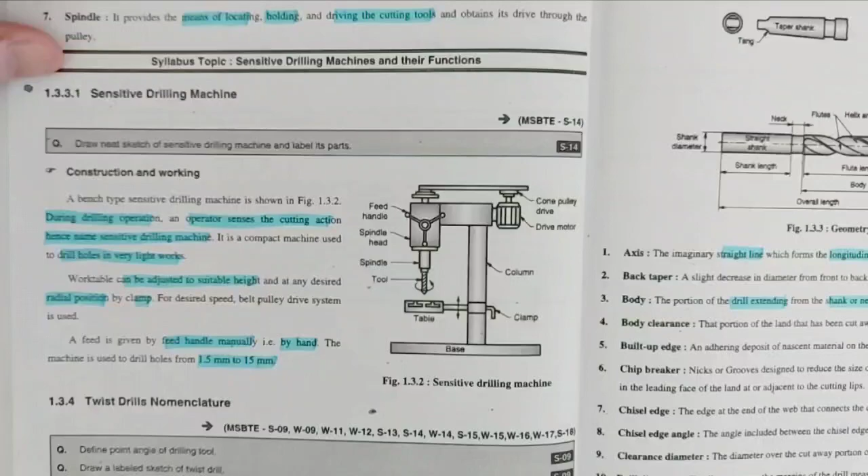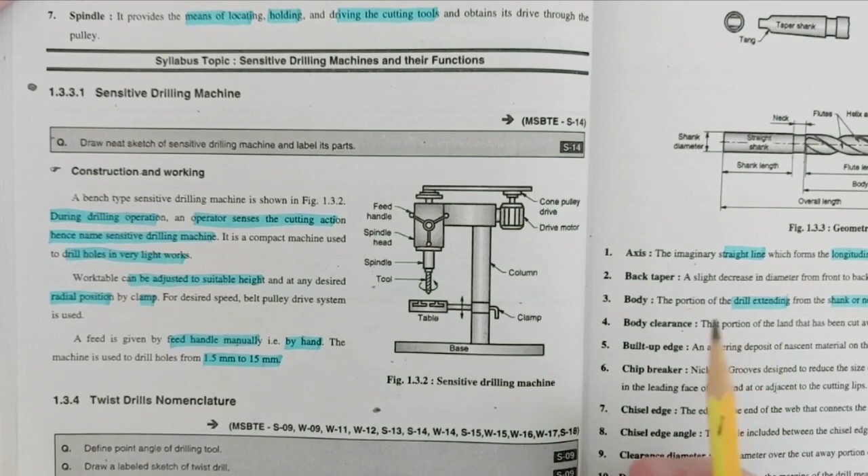A sensitive drilling machine. As the name suggests, sensitive drill machine - the operator senses the cutting action. That's why it is called sensitive drilling machine.

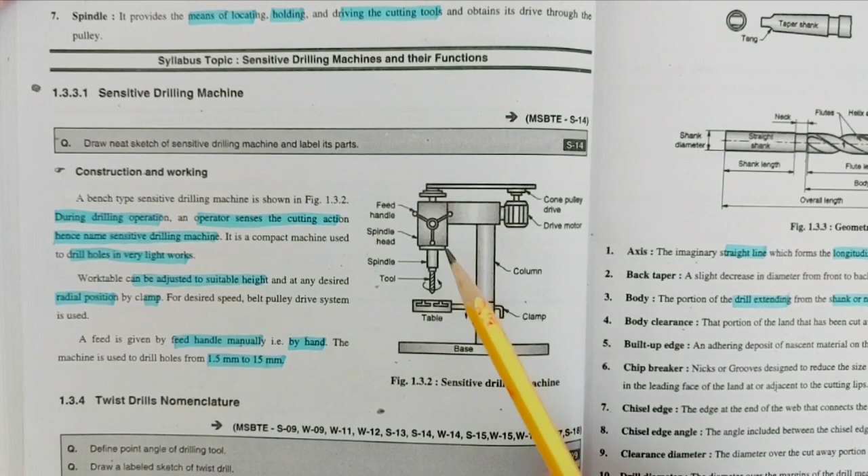This is the bench type sensitive drill machine. Since the operator senses the cutting action, means either the hole is completed or not, operator senses by giving the feed by this handle. Spindle moves down, tool cuts the hole. So operator senses through this handle whether the hole is completed or not. That's why it is called a sensitive drilling machine.

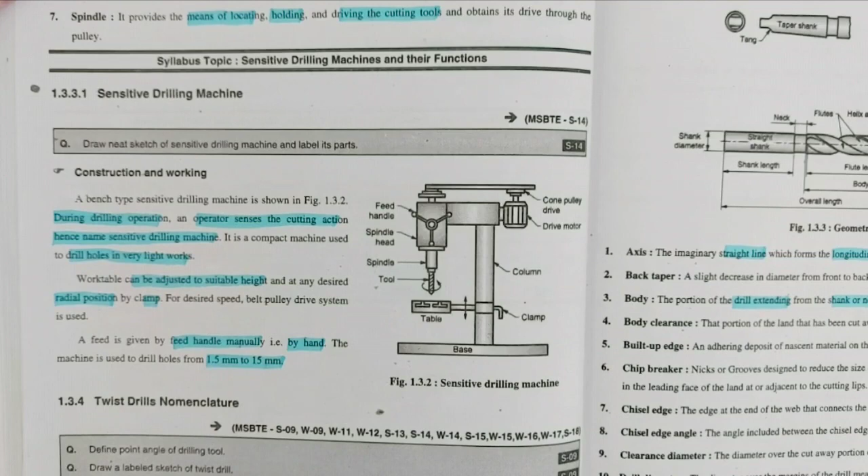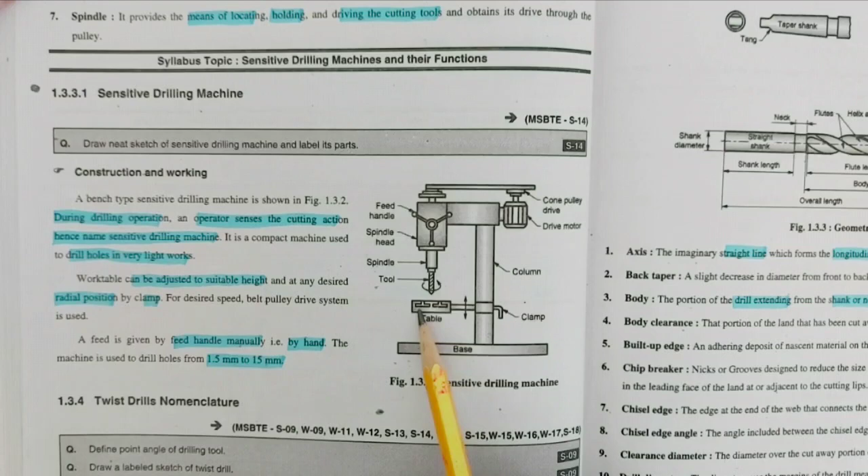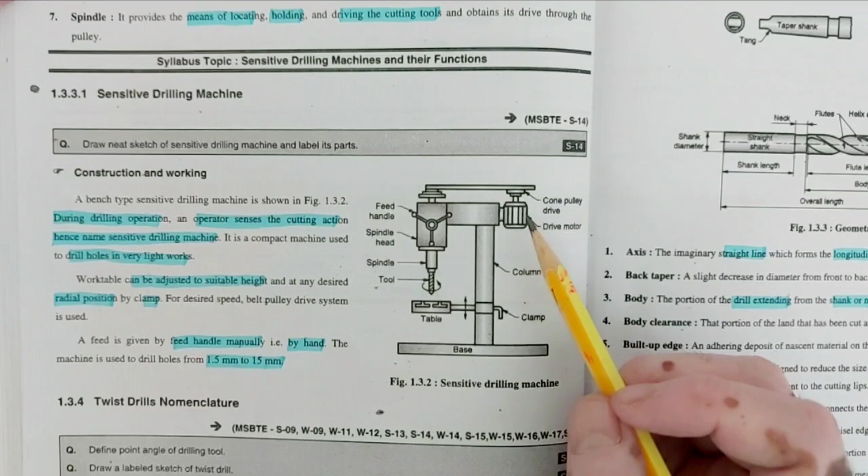Obviously this work table can be adjusted according to the height of the workpiece, and there is a radial clamp provided. This column, this motor, this pulley, belt - this rotates and spindle rotates, and this feed handle is used for giving the feed to the workpiece. Table can move up and down, and this feed is given by handle manually, meaning by hand. This machine is suitable for drilling holes from 1.5 millimeter to 15 millimeter diameter.

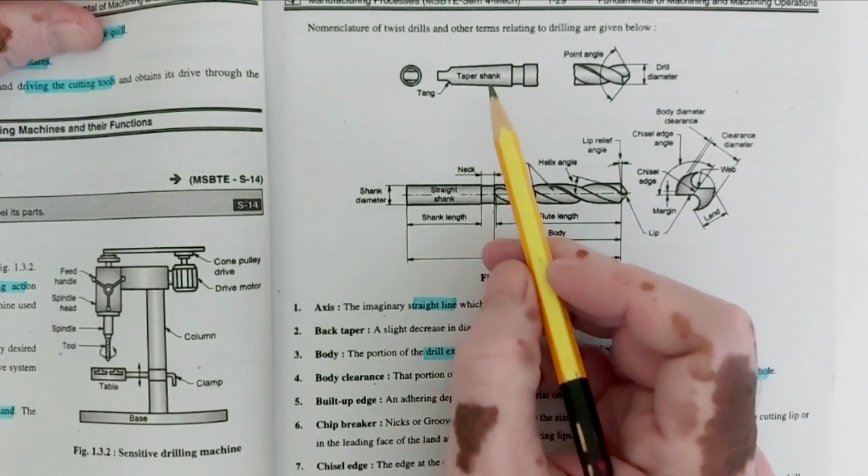Then nomenclature of drill bit. So this drill bit, this taper shank, this point angle, drill diameter, and these are called flutes: helix angle, lip relief angle, flute length, body, shank length, overall length of the drill bit. So this is the twist drill nomenclature.

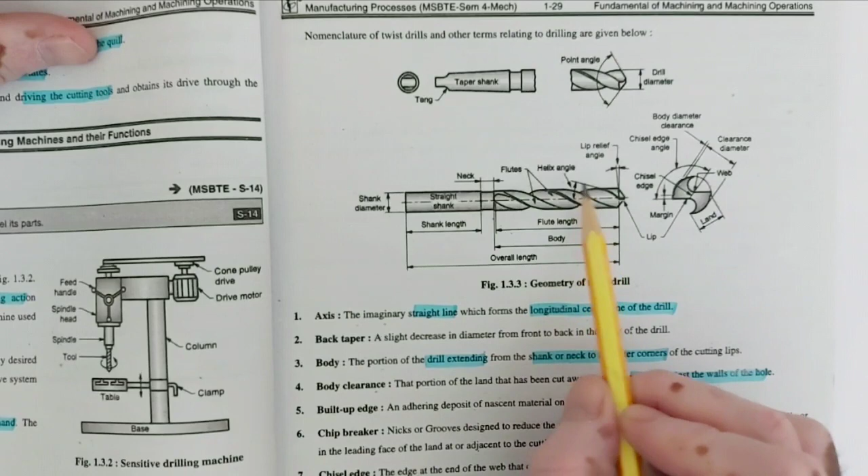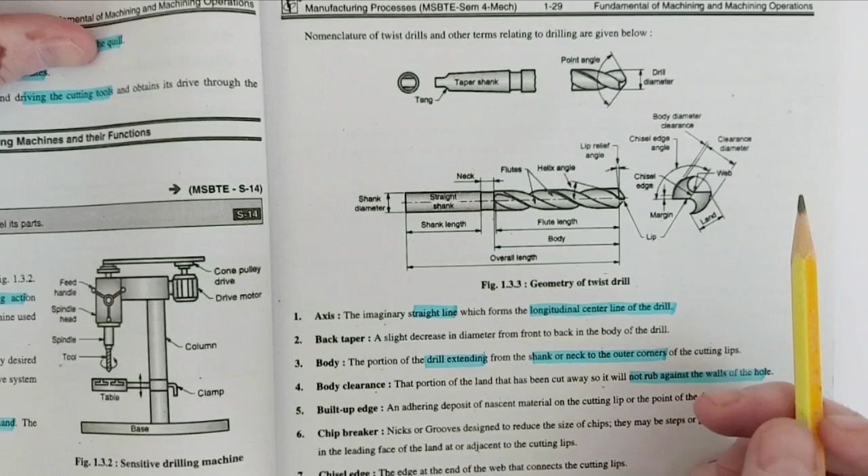So this twist drill - because spiral flutes are provided, that's why it is called twist drill. And all diameters, land, lips, chisel edges are provided in the drill bit for proper cutting.

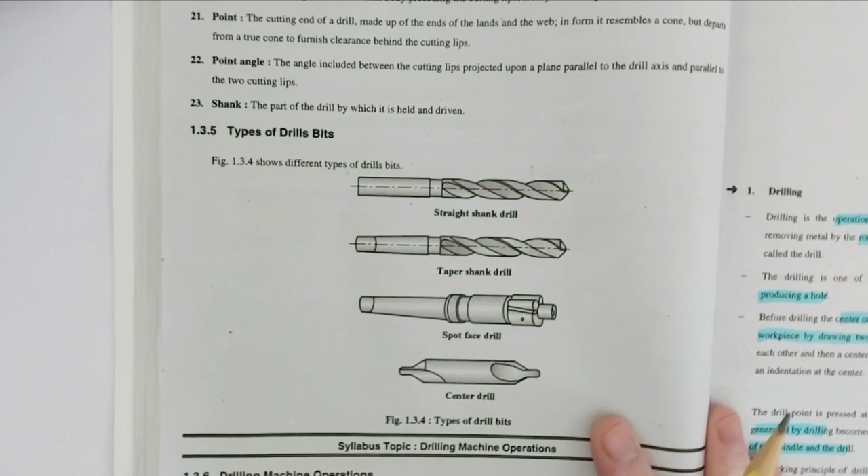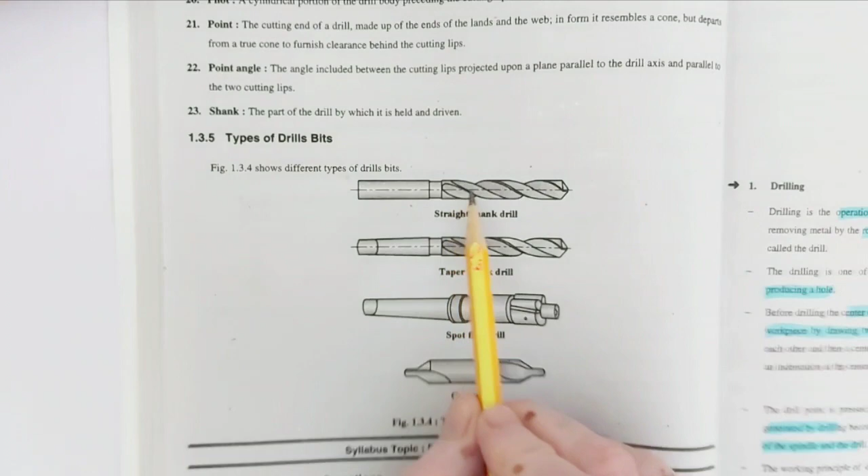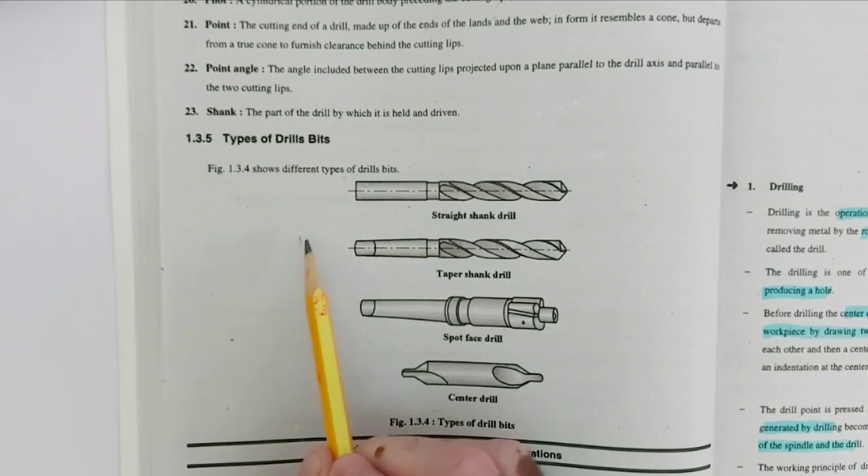Then types of drill bits. Straight shank drill bit, in which this shank is straighter one, that's why it is called a straight shank drill bit. And this taper shank - this taper is provided for holding into the sleeve of the drill machine. This is the Morse taper. Morse taper is 1:20. This standard taper is inserted into the socket of the sleeve. So since the shank is tapered, that's why it is called a taper shank drill.

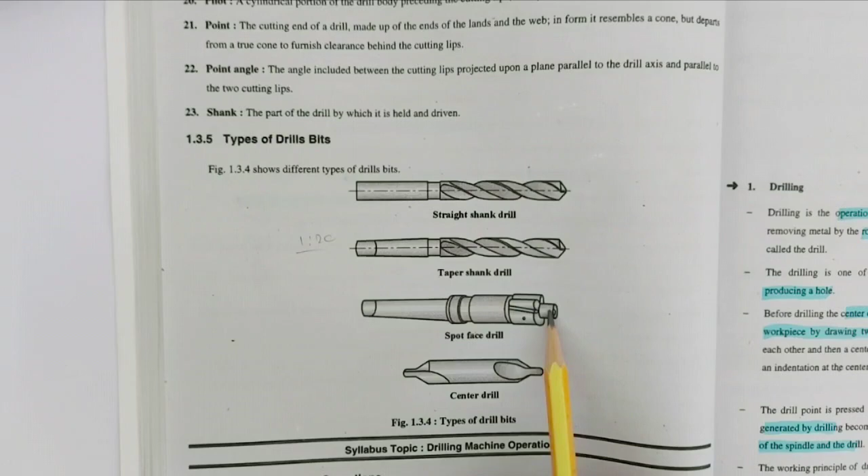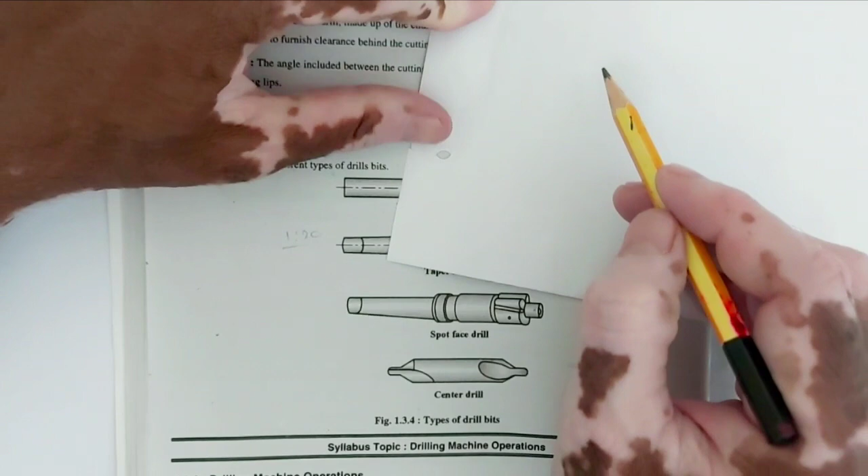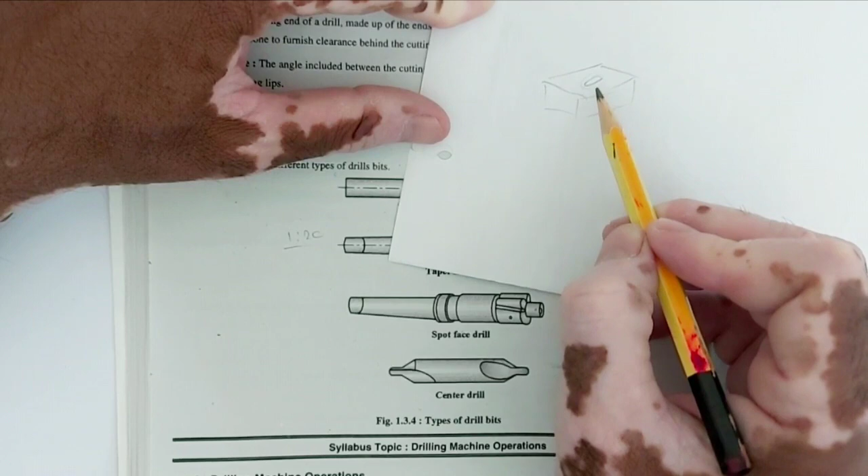And spot face drill. Spot face drill means this portion is provided for inserting into the hole. Sometimes what happens - suppose this is the workpiece and you made a drill hole over here. So this surface is a rough one. For cleaning this surface, spot face drill bit is to be used. So this portion is cleaning the surface of the hole. That's why it is called a spot face drill.

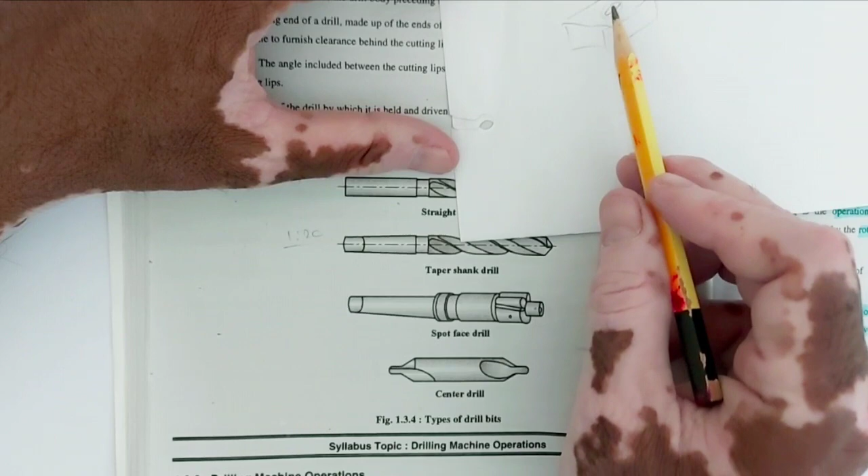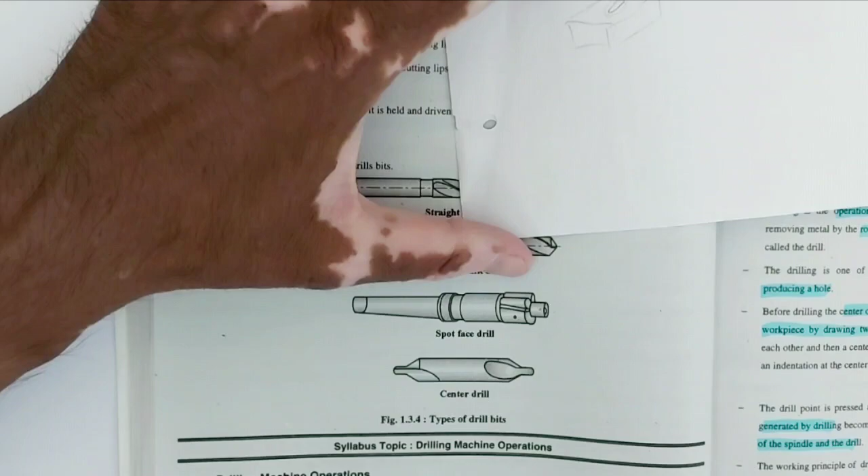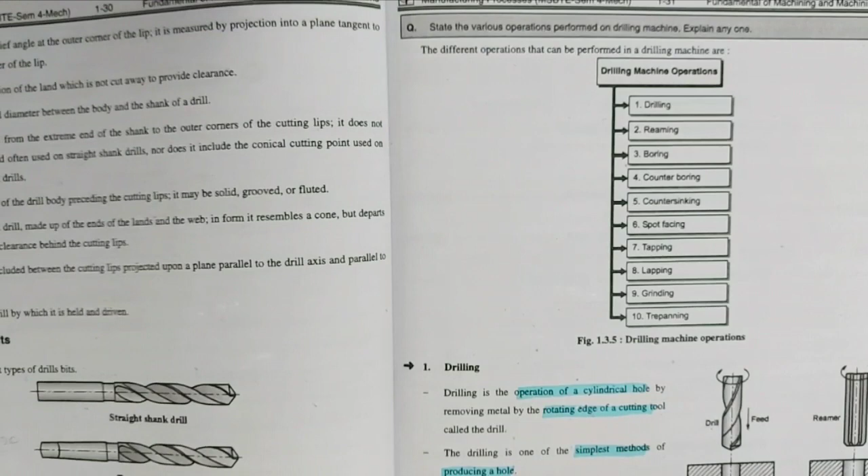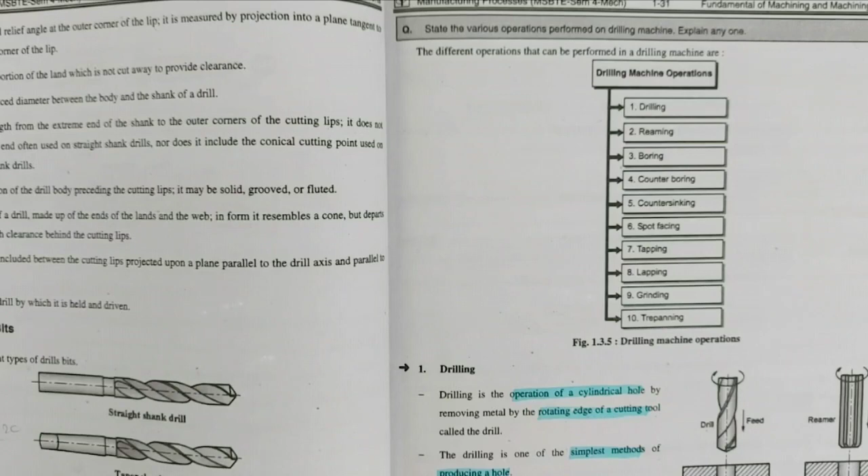Then center drill, for marking the center before using the workpiece on the lathe machine. So now there are different drilling operations to be carried out on a drilling machine: drilling, reaming, boring, counter sinking, spot facing, tapping, lapping, grinding, and trepanning. So one by one we will see the operations.

First one is drilling. As you know, the drill bit is required for making the hole, for making a cylindrical hole by removing metal by rotating the edge of the cutting tool called drill. Drilling is the simplest method of producing a hole.

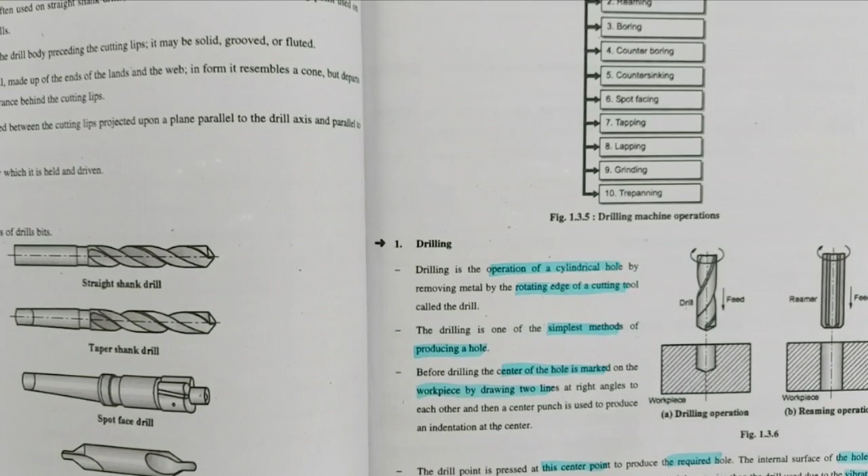Before drilling, the center of the hole is marked on the workpiece by drawing two lines at right angles to each other, and then a center punch is used to produce an indentation at the center. The drill point is positioned at this center. The internal surface of the hole so generated by drilling becomes rough, and the hole is always slightly oversized than the drill used, due to the vibration of the spindle and drill.

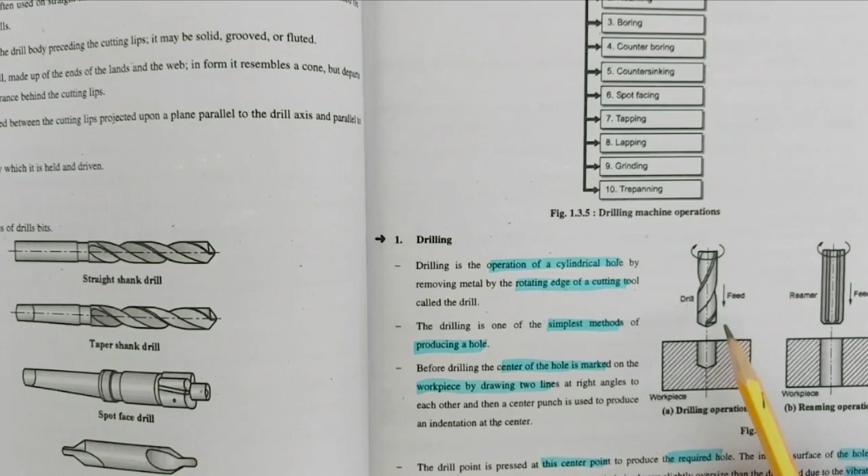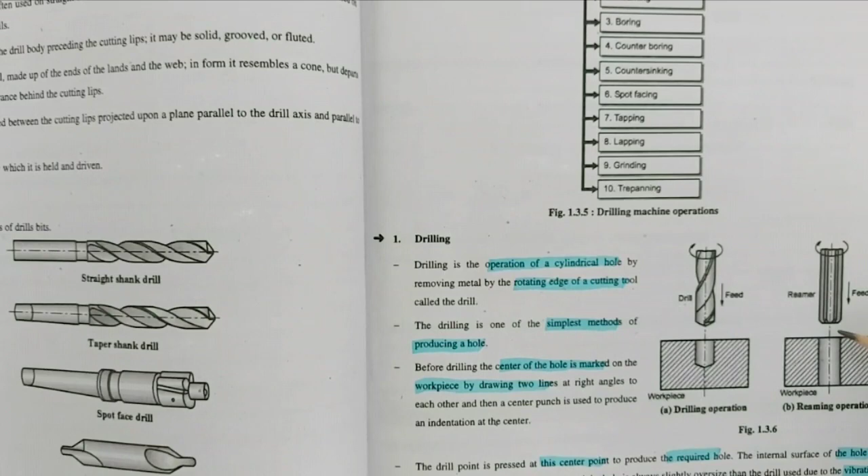Then second one is reaming operation. Reaming operation means cleaning the hole. After drilling, you may observe the marking of flutes on the drilled hole. So for cleaning that hole, reaming operation is carried out, in which a reamer tool is used, having straight cutting edges of the same diameter. It is inserted, and the reamer rotates as the drill bit rotates in the drill machine, so this hole gets cleaned up.

That operation is called reaming operation. This operation is carried out after drilling, for getting greater accuracy. The tool used is known as a reamer.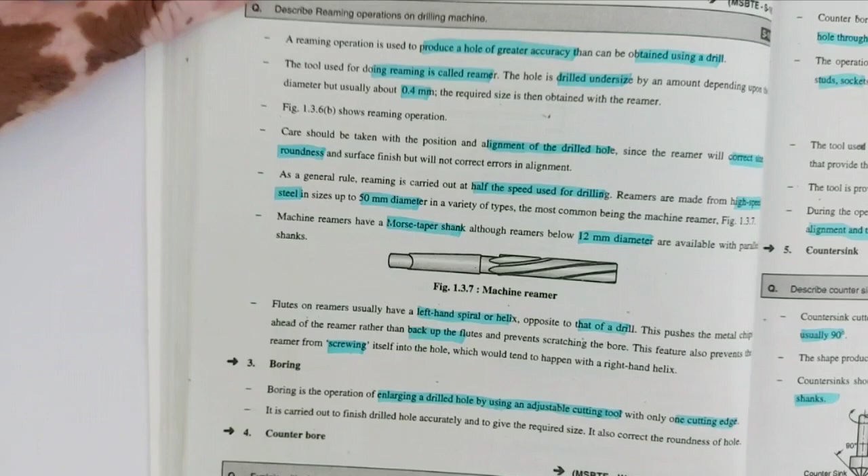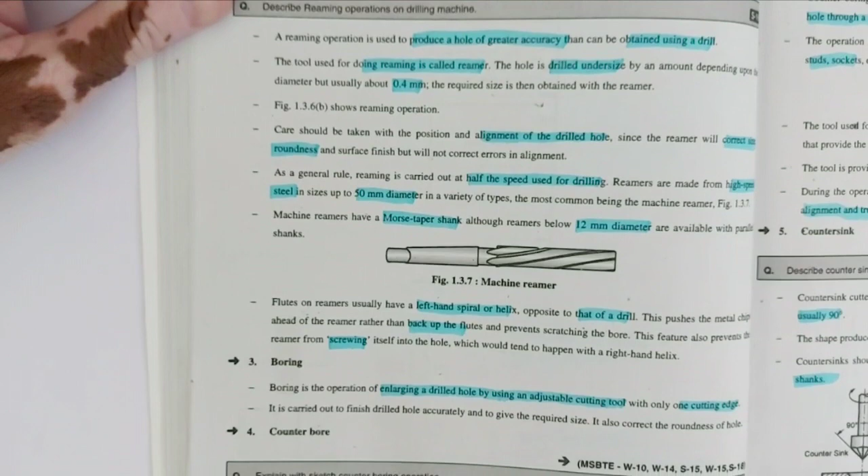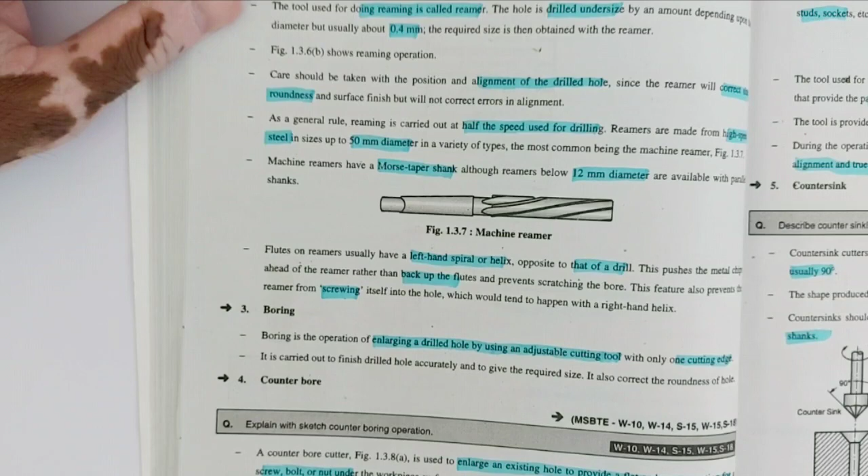Then boring. Boring means enlarging the previously drilled hole - enlarging the diameter of the previously drilled hole by using a cutting tool. That is called boring operation.

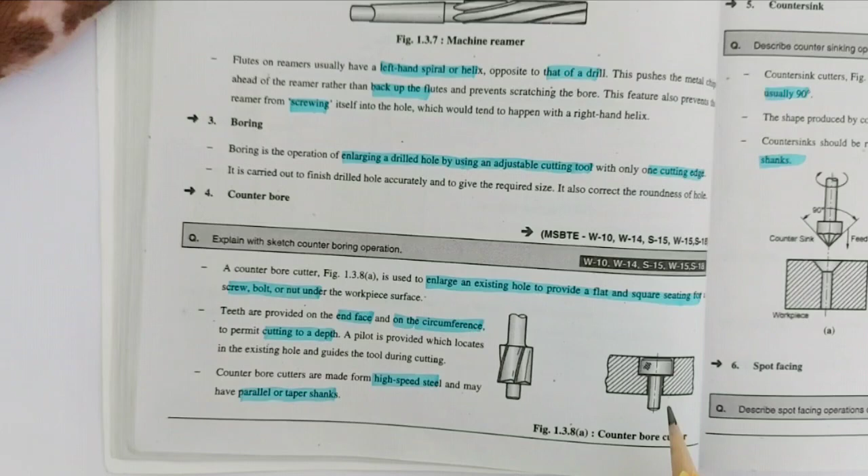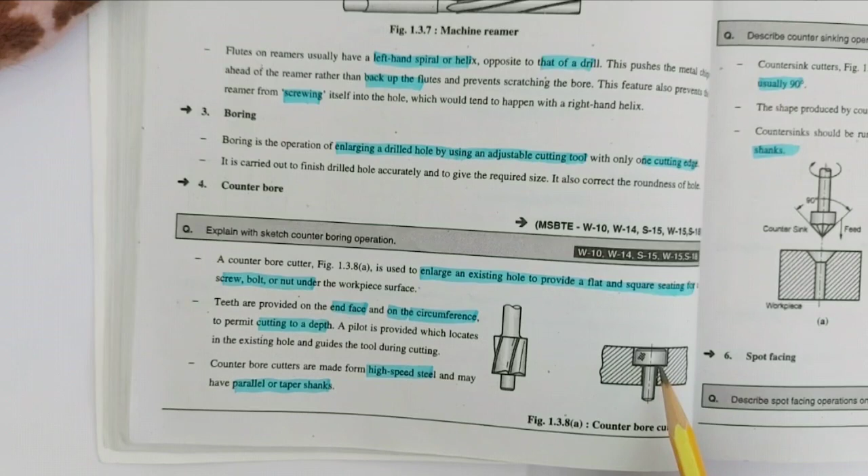Then counter boring. Counter boring tools are used, and it is carried out in two steps. First we should know what counter boring is. Counter boring means enlarging the top of an existing hole, to provide a flat and square seating for a screw, bolt or nut under the workpiece.

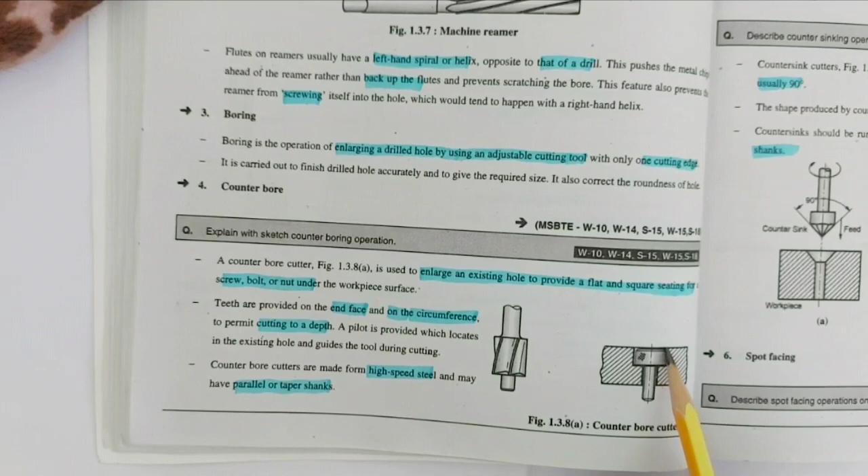So it is carried out in two steps. First we produce the hole, then after that the counter bore tool is used for enlarging the top of the hole - that is called counter boring. The figure of counter bore will be like this: this hole and this enlarged hole - that's the counter bore, to accommodate the head of the nut or bolt.

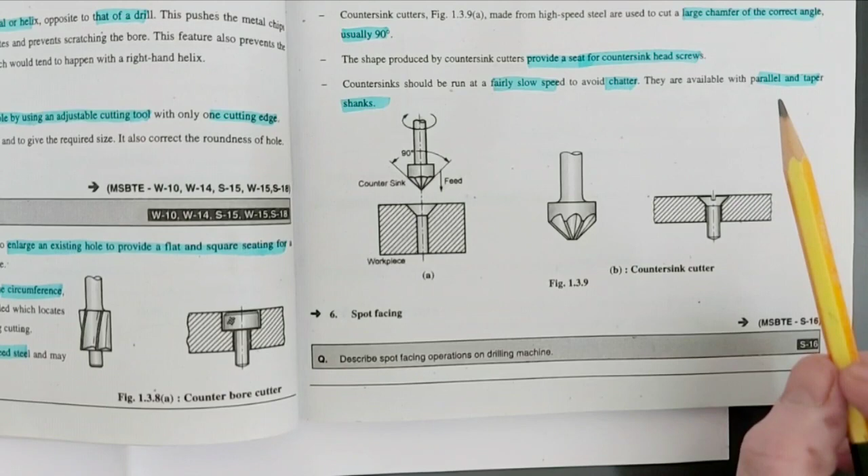So that's counter boring. Then counter sinking - the same process is there, only difference is that first you produce the hole, then counter sinking tool is used for enlarging the end of the hole, but in an inclined manner. That is called counter sinking. The counter sinking tool is used to cut a large chamfer of the correct angle, usually 90 degrees.

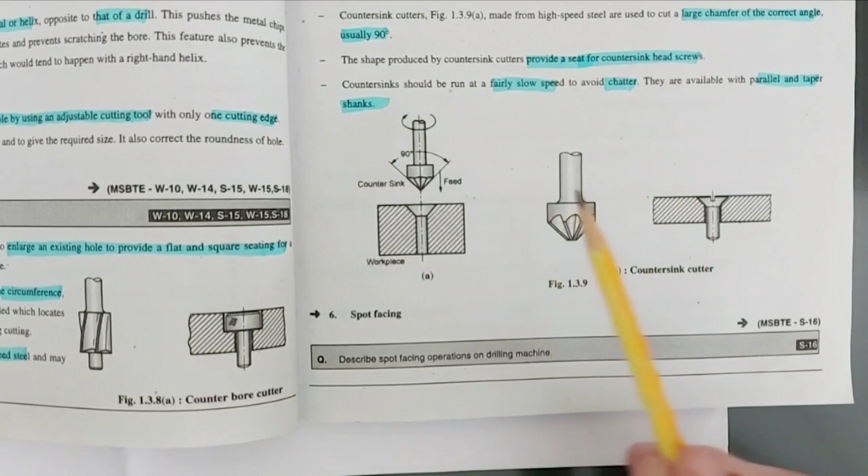So here you can see the operation. This hole is produced and this counter sink is inserted. This is the tool for hiding the head of the screws. Okay, so that's counter boring and counter sinking.

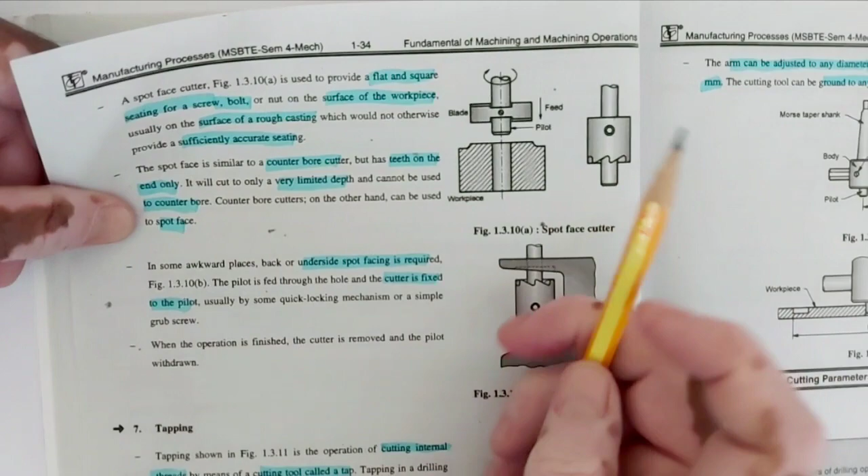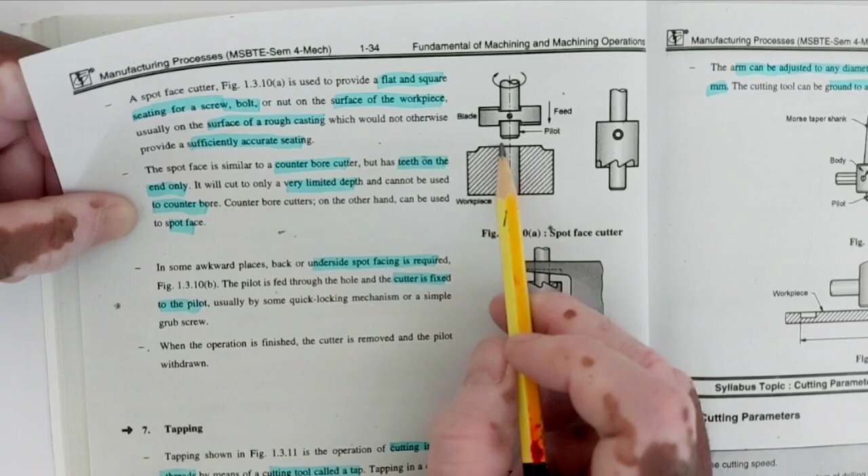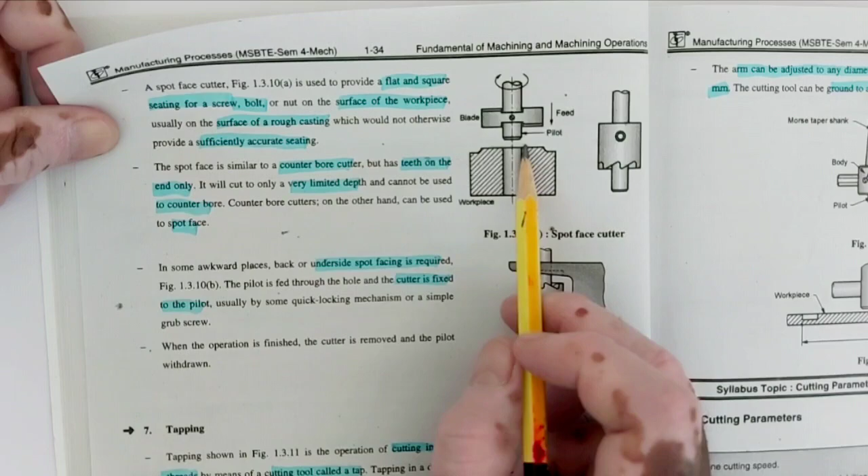Now spot facing - earlier I told you about spot facing. First produce the hole, and the spot face tool is used for cleaning the surface of the hole, for accommodating the head of a nut or bolt, or for keeping washers over there. So it's a seating for screw, bolt or nut - that is called spot facing.

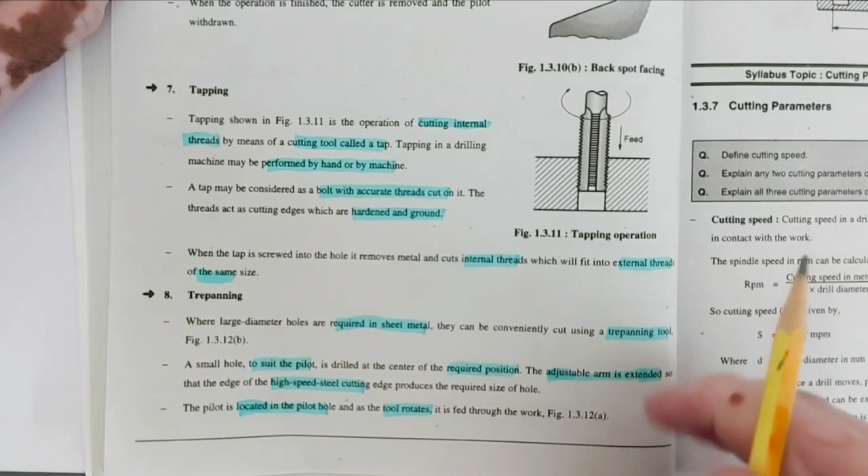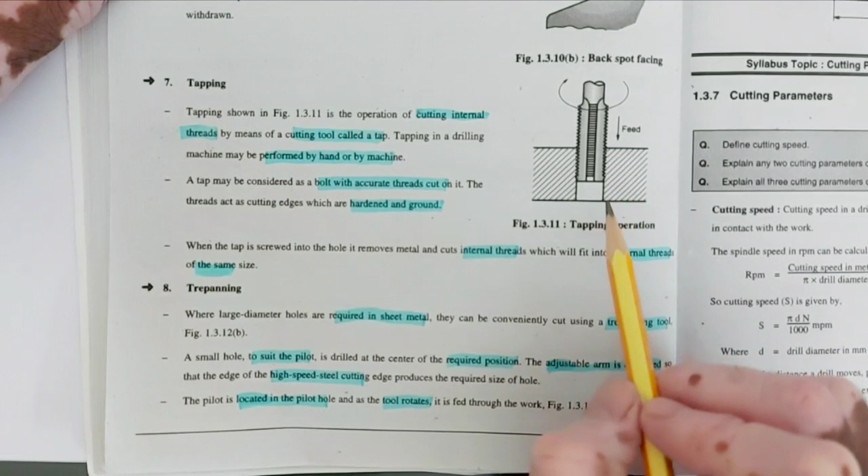Then tapping. Tapping means making internal threads, so tapping is the tool for producing internal threads. Instead of a drill bit, a tap is held into the spindle. So after making the hole, this tap rotates into the hole, and the thread will be produced.

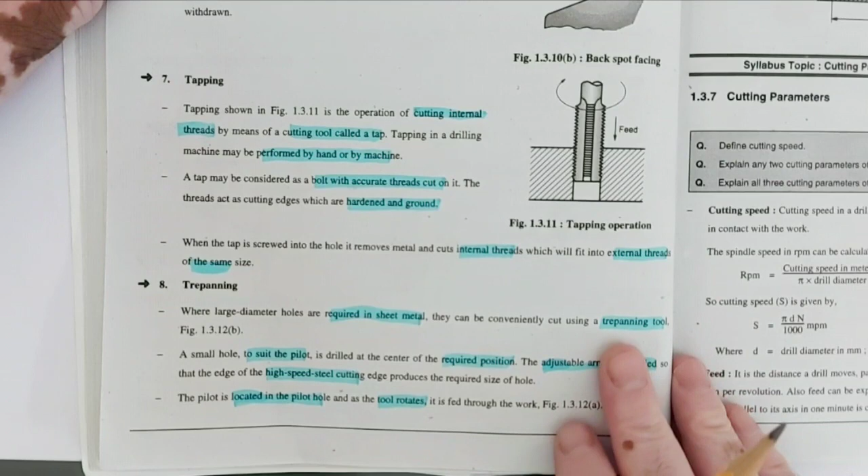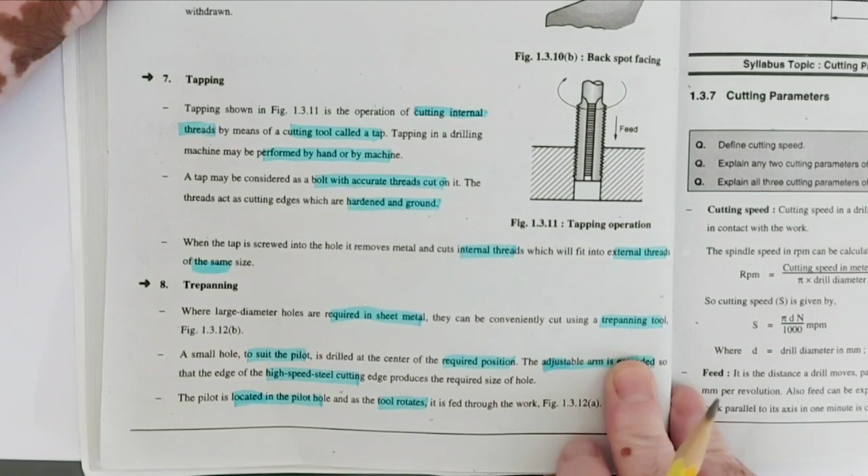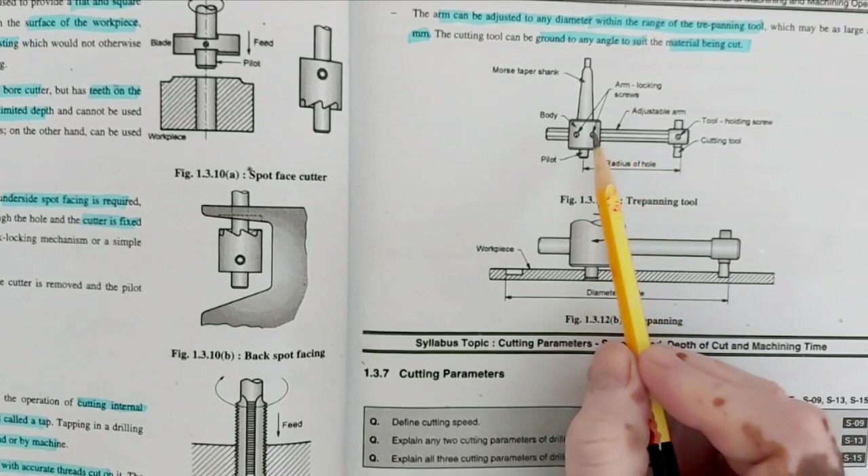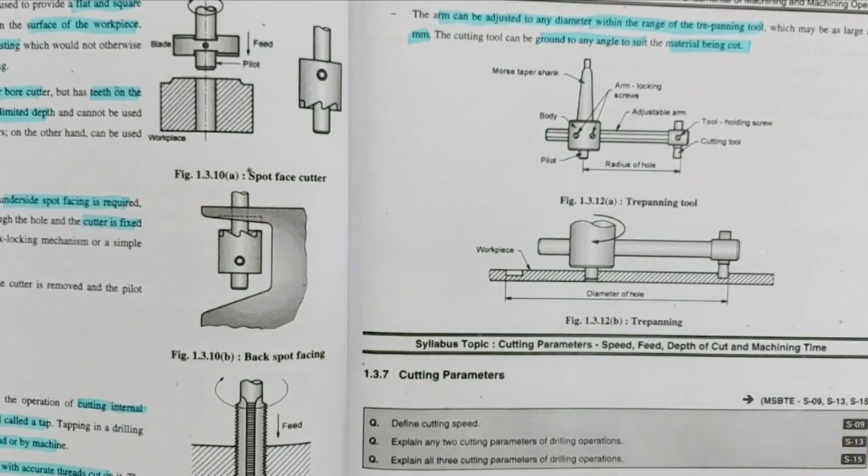So a pilot is produced here, and this arm lock, Morse taper shank, tool holding screw, cutting tool is provided, and this pilot, when it rotates, will produce a bigger diameter, and this cutting tool cuts the metallic sheet into a bigger and larger diameter, up to 350 millimeters.

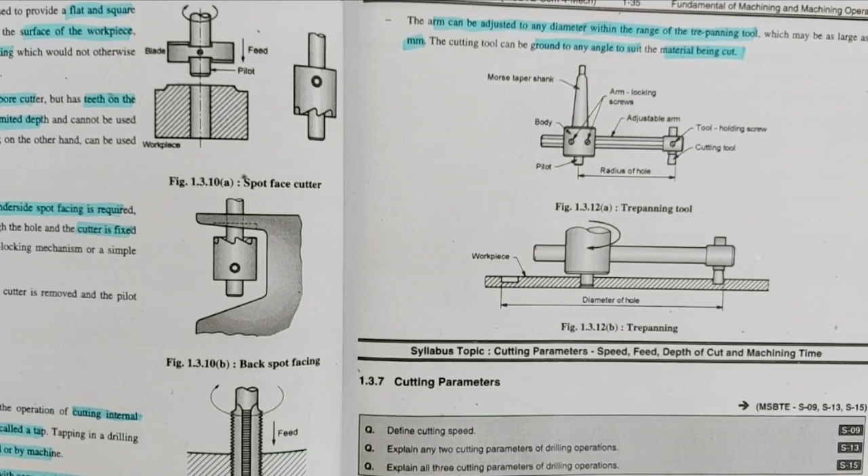Okay, so this is about the drilling machine. In the next lecture we will start shaping and slotting machine.